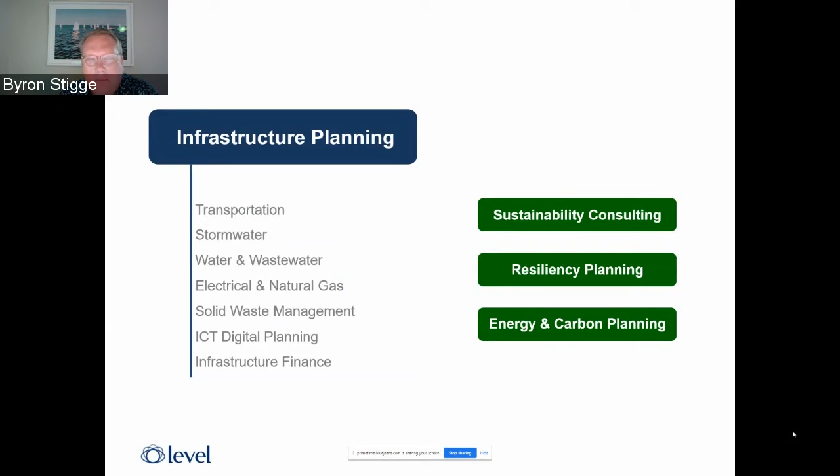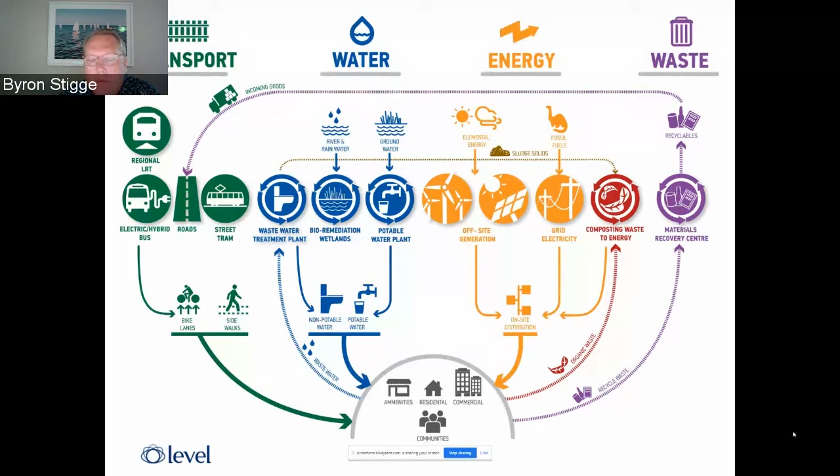Thank you, Michael. Good morning here in New York. My name is Byron Stigge from Level Infrastructure. I thought Michael asked me to start with a broad perspective on sustainable streets. My practice is infrastructure engineers. We're civil engineers and transportation planners, and we work on a lot of master plans and sustainability plans at a neighborhood and city level. Our practice really focuses on integrated design between systems. So we're not only focused on stormwater, we also work on bike lanes, renewable energy, and solid waste management, trying to see how those systems work together from an engineering perspective. So that's what I'll be focusing on today.

Our practice focuses on achieving sustainability through systems thinking, interconnected symbiotic systems, nature-based systems, post-carbon infrastructure, climate adaptation, and an inclusionary, participatory process, not a top-down process but a bottom-up process.

These are big principles, and we all acknowledge that when you start talking about sustainability, some people go right to solar panels or bioswales or some technology. Sometimes there are broad statements about resilience and holistic systems, and we found it helpful to structure benchmarking systems and costs in a way that makes sustainability more of a process than just a technology or a product.

So starting with vision principles is important, then getting key performance indicators and setting targets for yourself before you even start the design process. Once you have targets, you can measure costs against your targets and iterate between costs, design, and targets.

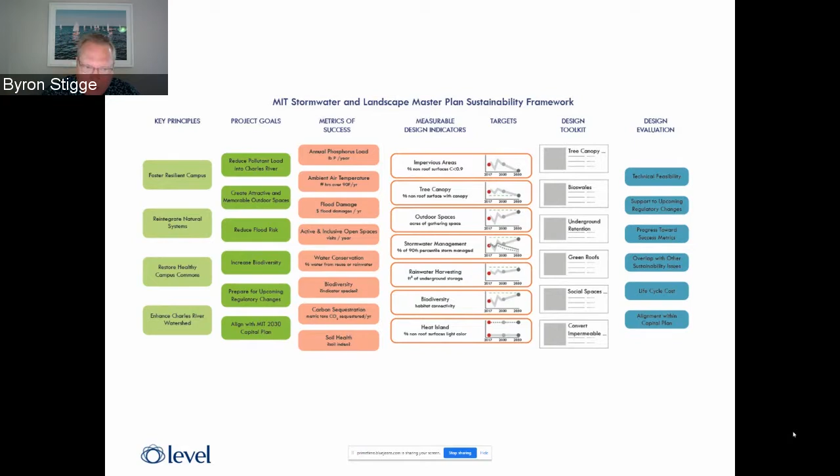So you can see that arc of the sustainability framework we use in our practice, and we find it helpful to put those broad statements in place alongside the details.

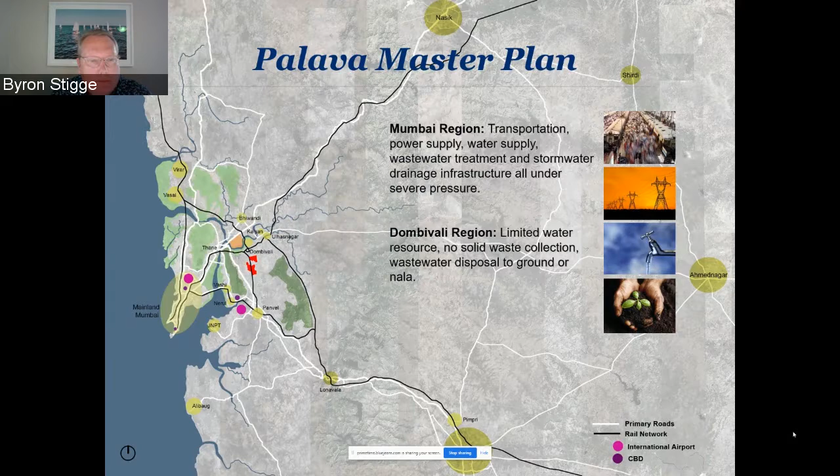I'm going to show you how we worked through a similar process in India, in Dombivali. I'm sure you've heard of Palava with the Lodha group, east of Mumbai, about 20 kilometers or so. I started working on the project about 10 years ago, the concept master plan with Sasaki.

Lodha group has about 10,000 acres, really large, a couple of large parcels, and we developed mixed-use integrated neighborhoods around green spaces and lakes, with strong urban corridors and residential streets on the side. You can see quite a lot of residents and jobs projected.

In the context of this webinar, I wanted to talk about the process I've been working on for this project over 10 years. Some things have been built, and we've learned a lot of lessons in that time, which I wanted to share with you all.

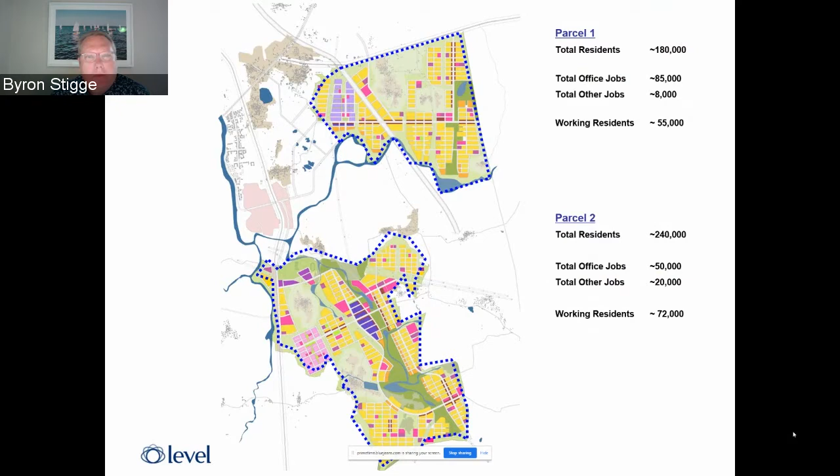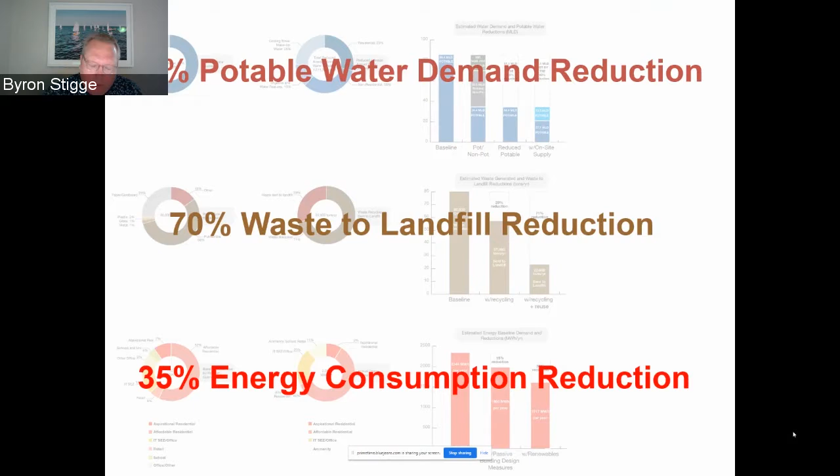We started again with broad goals, and I think our most ambitious goal, considering the environmental issues east of Mumbai, was water. We wanted to understand how the city could reduce drinking water demand dramatically, not just with low flow fixtures building by building, but with neighborhood and city scale solutions. How do the streets fit into that?

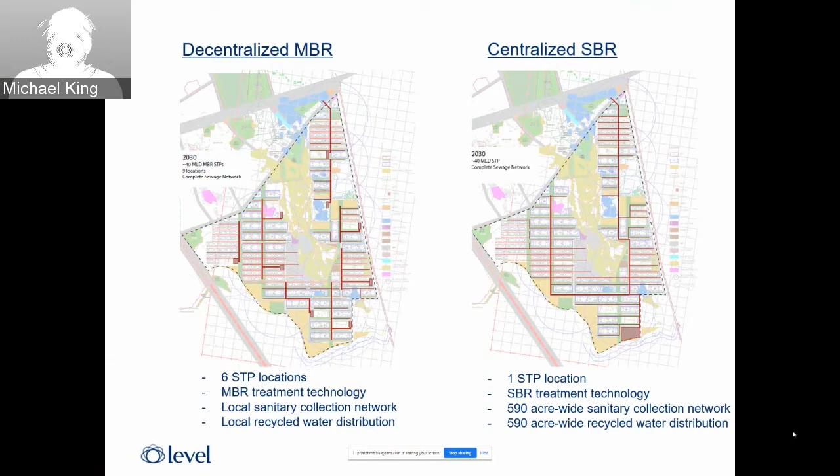So we looked at a variety of options. One of the most important aspects is always wastewater treatment and recycled water. Because there are hundreds of buildings on these parcels, the typical building-by-building wastewater treatment and recycled water solution wasn't really desirable. You can have economies of scale and improve technology and cost when you work at a larger scale.

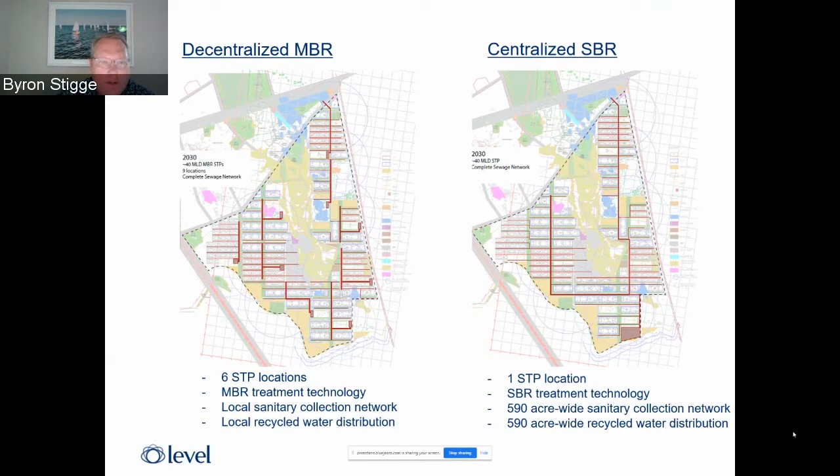So the streets were the primary corridors conveying wastewater treatment. We looked at both decentralized and centralized systems, and ultimately went with a centralized system. The streets acted as the vertical, north-south trunk lines for stormwater, wastewater, recycled water, parking, et cetera.

In the background, I don't have too many good photos of these buildings, but they're actually quite nice parking garages with a nice facade treatment. They're integrated buildings, not just car parks. That's where the wastewater treatment plant is located, and where the recycled water is stored.

That's also where the bikes are stored, where waste is transferred, and there's an electrical substation there. So a lot is happening in those utility buildings, which means the streets leading up to them are quite filled with utilities.

So the street is performing the function of making the neighborhood and the city more sustainable and functional, to achieve those broad sustainability goals.

This was one of the early sections from the design team, from the architectural team. The first time I looked at it, it was noticeably missing anything below the pavement line, and I think sometimes we see that a lot—designers are thinking just about what's happening with what you can see.

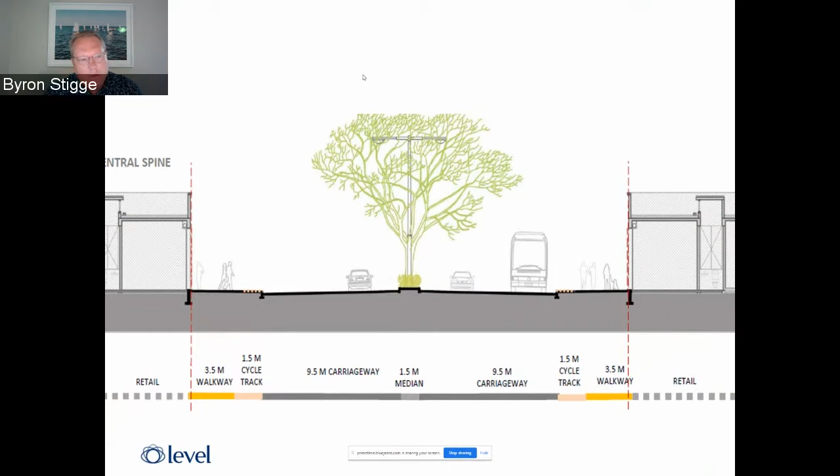But there are a couple things that are good here. There are these big trees that provide a lot of shade. We were thinking more trees on these corridors would enhance the environment. And there was a cycle track, bus stations, a nice sense of that retail and walkable spine. So we thought that was a lot of positive things.

But what ended up happening is when you overlay all the utilities, you don't have room for the trees or the street lights or the swales or anything else. So in terms of a design process, you really have to think about all the stuff that goes into a sustainable street.

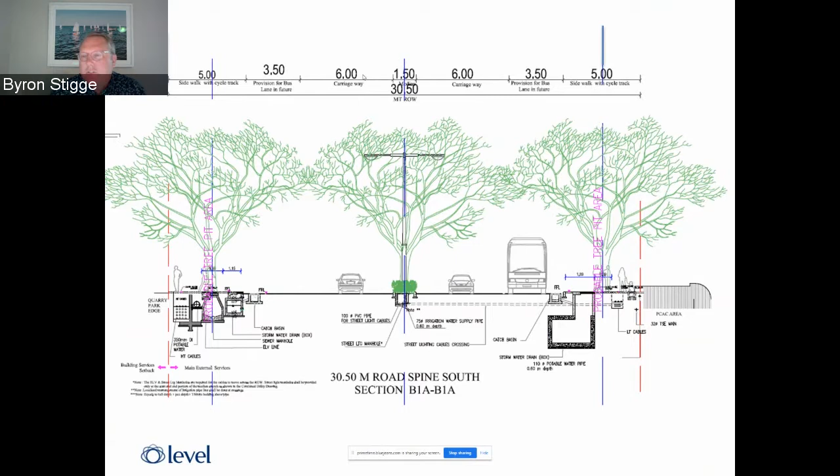Going across from left to right, there's ICT cables, electrical lines, drinking water, storm water, a sewer line, street lights, irrigation for the trees, street lighting electrical lines, a catch basin, more storm water, and more electrical cables. So there's just a lot going on, and we struggle to get any of those utilities in the street.

You can see the street here is just pavement, and all the manholes and all the utilities are in the sidewalks. That really took away from the quality of the street, because now it's not shaded, and there's a big setback between the buildings—the trees are set way back.

So as we move forward in the project, we're trying to push as many of those utilities—not all of them, but some—into the street right of way, where you can put the manholes and allow some space for green features and other stormwater management and urban heat island effect improvements.

You can see how some of that starts to improve over time. It's a great project to learn on, because as you build phase 1, then phase 2, then phase 3, you can always learn and improve from the design.

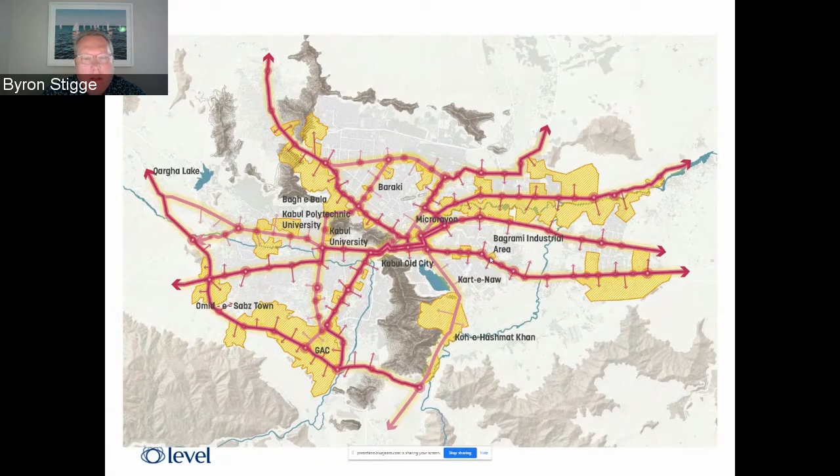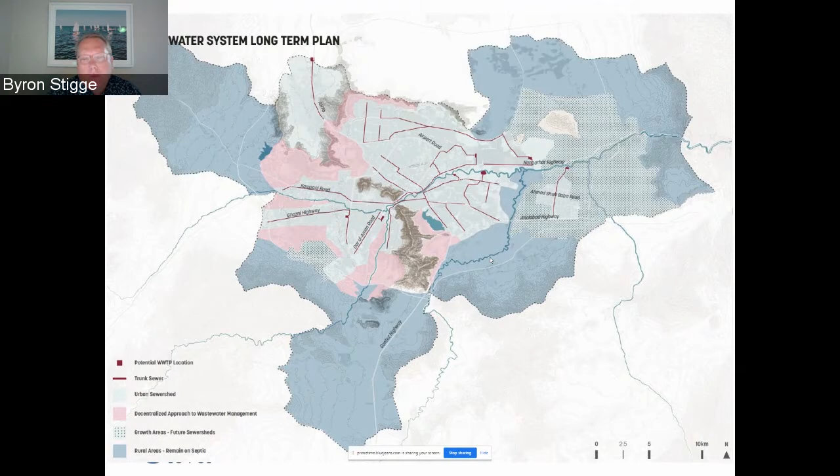And of course, the landscape and the urban design were all developed. But from our work, we used those corridors as the primary pathways for trunk stormwater, trunk electrical lines, and trunk wastewater systems, again at a city scale.

By developing that corridor, that sustainable street, over time the networks can be built out. With the public investment in the streetscape, a lot of private and community investment can then bring water and sewer and power and ICT into that trunk line, and recycled water as well.

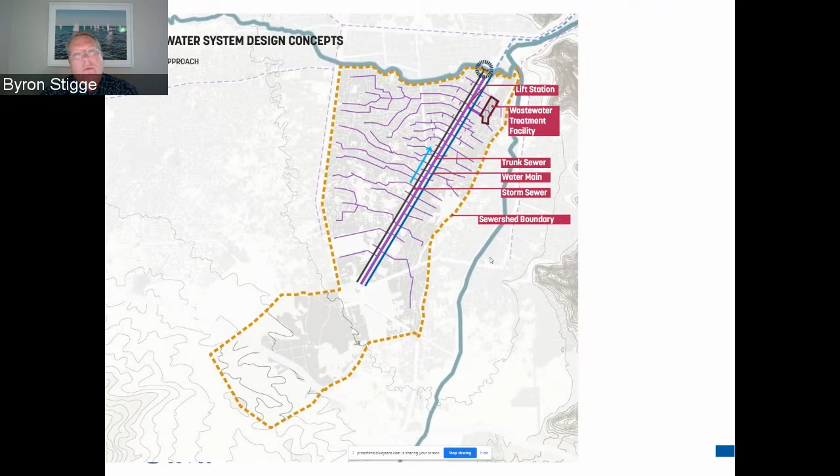The function of that street has so much going on. There's a BRT line, street trees and bike lanes, storm sewers under the BRT lines, drinking water lines in the sidewalks, electrical lines in the sidewalks, bioswales—really a rich and complex street design.

The idea was just to focus investment in that urban corridor, which would then have spillover effects and rejuvenate the neighborhoods on either side.

Of course, it's not just a design process, and we really learned that on this project in Kabul when we started to map the stakeholders working in that roadway. It's not just the Ministry of Public Works, there's the municipality itself, the bus riders, the donors, the water supply, the power company, private developers, and of course, most importantly, communities.

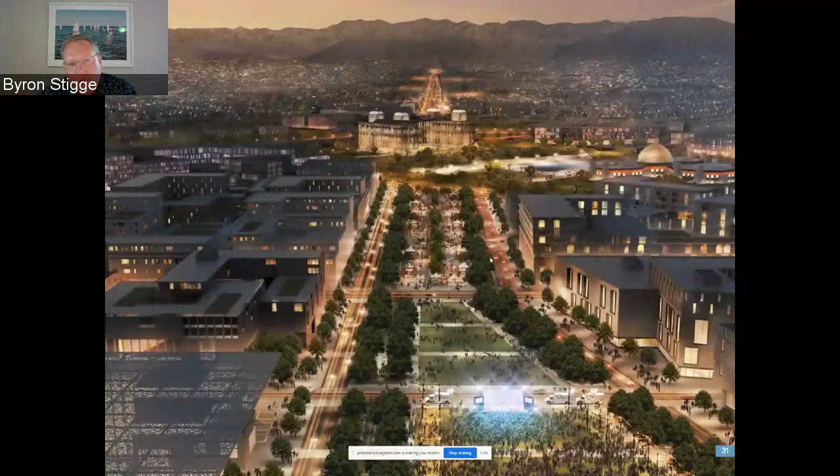There's so many stakeholders engaged in streetscapes, so getting them all on board with the vision and the opportunity of making sustainable streets was actually as much a part of the design and the project as the actual cross sections and where the utilities go. This was the vision of these sustainable streets: to really bring Kabul back to a 21st century, rejuvenate the city, and look forward instead of backward for the people who live there.

We have a lot of experience all over the world, and one thing I've noticed as I travel is every city, even different parts of cities, has a way of doing things. The streetscape looks like this, but every one of these streets is different. Every one of these municipalities, communities, cultures, weather patterns is different. So obviously what works in San Francisco is not going to work in Delhi, but there are some things you can learn from others. I really try to encourage people to look beyond their own streets and around the world and pick some good things, because a lot of good things are happening around the world.

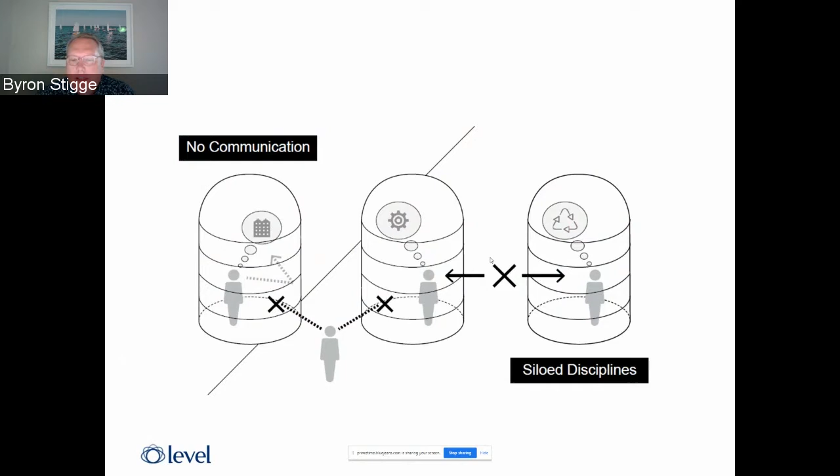Really collaborate. Collaboration is the key to innovation today. It's less about new technologies and more about bringing people together with different disciplines to work together and find new solutions. That multidisciplinary thinking is where we find a lot of solutions to sustainable streets.

With that, I'll pass it back to Michael.

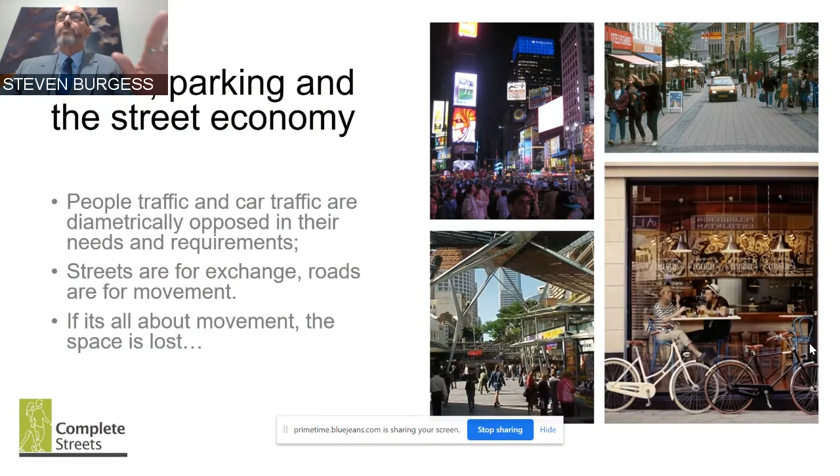If you make it all about the movement and not about all those other things Byron talked about in your street, you will not prosper. It will be too difficult for you. Your streets will be working too hard and your city will always struggle.

Now, I always develop these and I have them sitting on my desk to this day, and I keep changing them, I keep refining them, and you'll have access to this so you can copy some of mine if you like, but make your own. When you're working in street making and city making and development, and all those different things that go into making streets, there is a lot of white noise. It's coming at you from everywhere.

You're being pushed and pulled and made to change your mind. Oh, I want more of this. I want more space for this type of infrastructure. No, I want more space for this. You have to find a way to keep focused on what you're trying to achieve, which is a clean, green and safe space where the community can prosper long term. That is, a space that can be sustained.

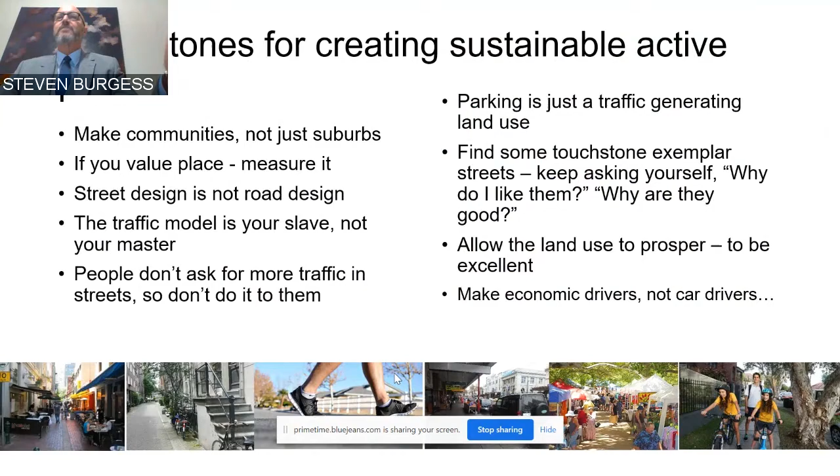Sustainable, active place where people can prosper. I've got a few there. Feel free to steal as many as you like. But by the same token, make your own local ones, so that when all that happens to you, you can stay focused and say, I know what I'm doing. These are my touchstones that I keep going back to. This is how I'm going to make a good community where I live.

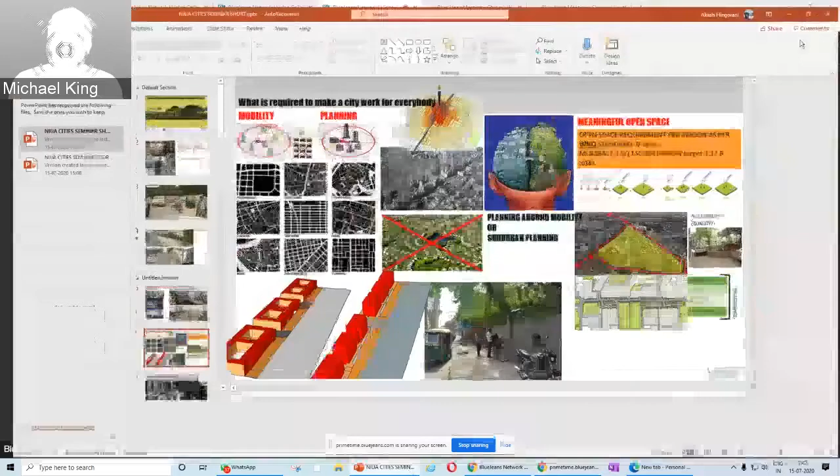I assume it. Can you see my screen? We can see a screen. We assume it's yours. Okay. Got pictures. Whoa, it's got a lot of pictures. Now, once you hit present, it's going to have the bigger pictures. Take it away. Okay.

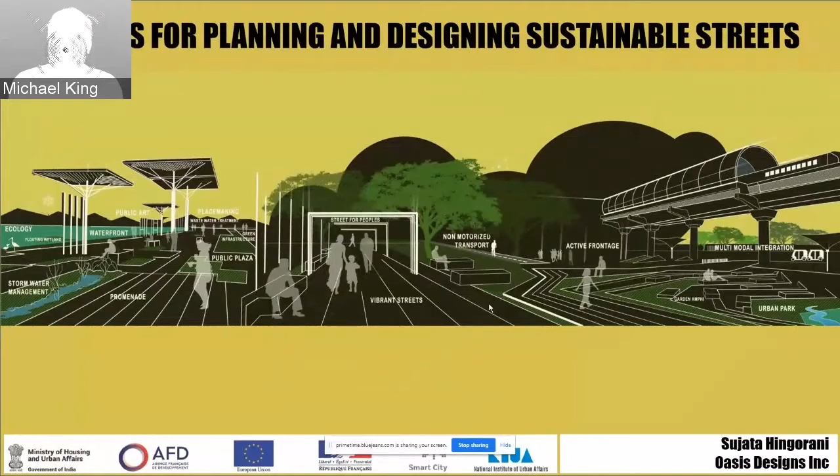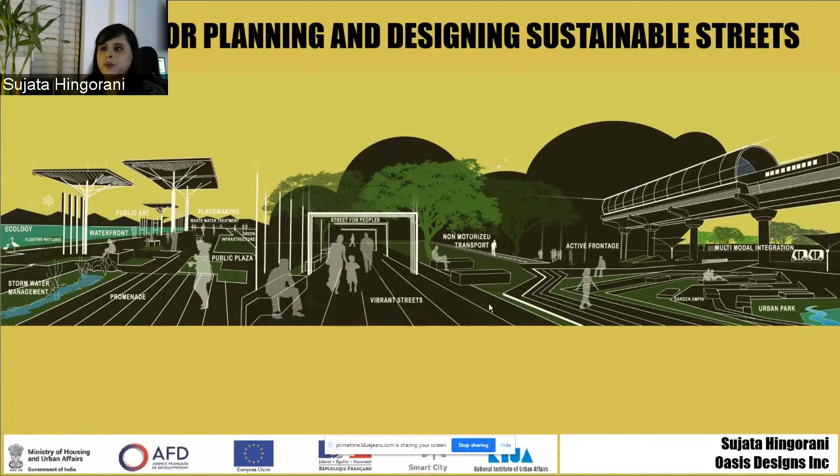Hi, I'm Sujata Hingorani. I am from Oasis Designs Inc. We are a multidisciplinary firm in Delhi. We are mostly working all over India on public realm projects.

So we are talking about streets today. Let's focus on what is the primary function, as my previous two speakers also said, that the primary function is about movement of motor vehicles, non-motorized transport, and pedestrians. Now, for each of these, the space given has to be according to their speed, comfort, legibility, and safety. Streets are also used for running infrastructure, conduits, and access of shop fronts, buildings, etc.

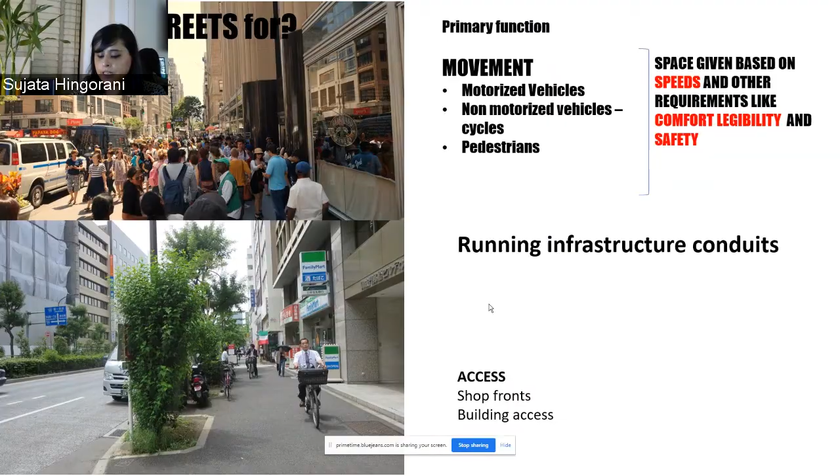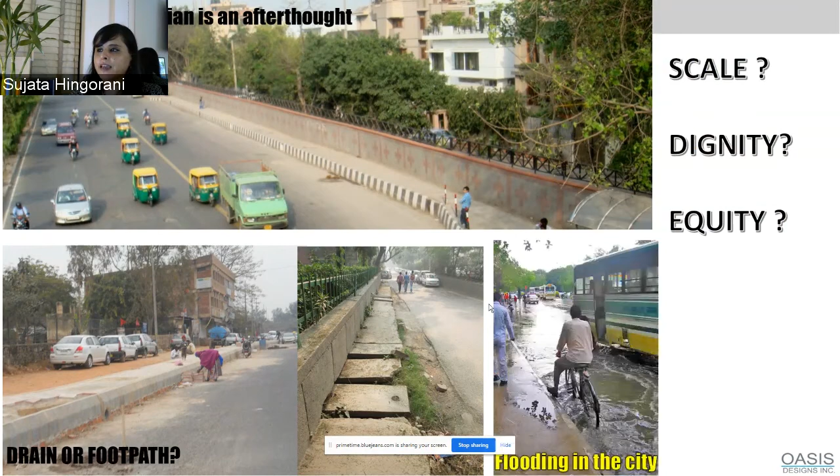But the problem in Indian cities is that we primarily focus on the vehicular infrastructure and just leave the rest as is. And even if we give a footpath, it's actually a foot wide in lots of places. Sometimes the footpath is an extension of a drain top, and then it still does not solve the flooding in our cities.

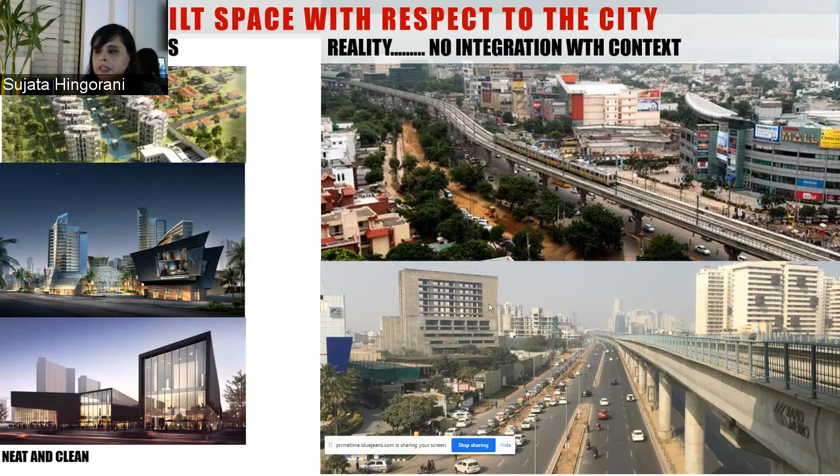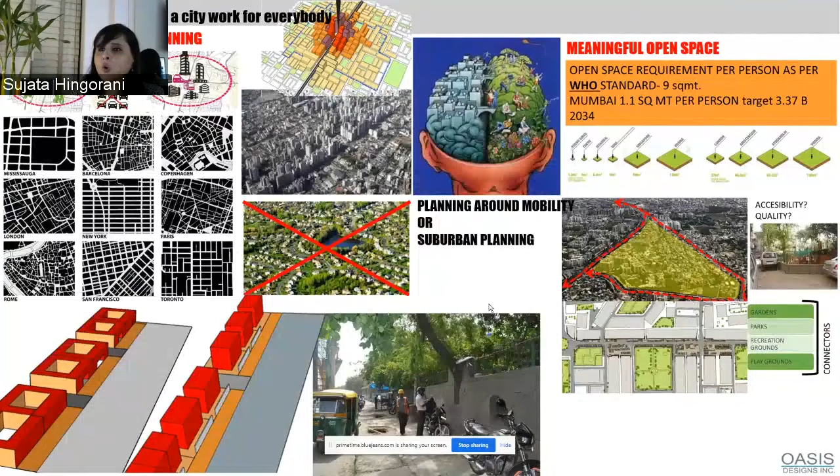And if you look at the private infrastructure, what people focus on is just within their property, and the outside is just left as is. So there is no integration of private developers to the outside systems. So what is required in our cities is holistic planning at a macro level.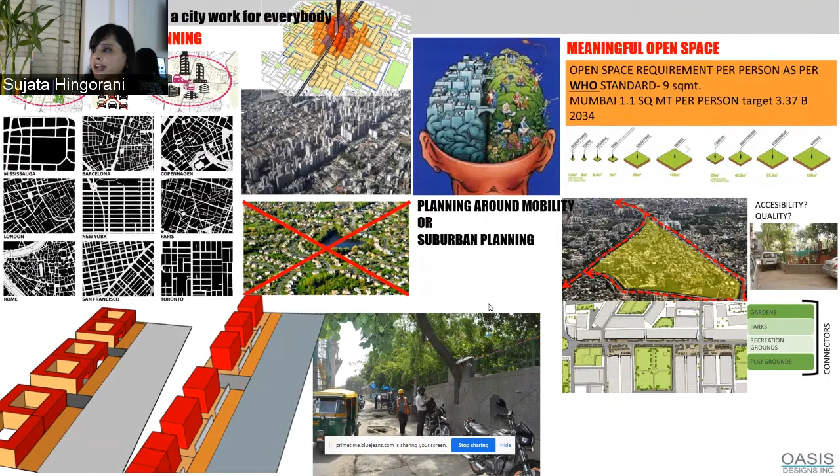The best cities are planned around transit, and at the micro level, even policy decisions of our city authorities, like having setbacks and all, are in fact bad for the city in terms of safety, etc. And even the open spaces which are there in the city, the access and accessibility, and what kind of open spaces, which is a requirement to have a better life.

Especially during this COVID times, we realized that open spaces are the safest for people. So as humans, we need public realm. It's not just a pretty little thing. So what is public realm? Parks, plaza, street, anything which is public and not private.

But where are we spending all our money? In India, we spend huge amounts of money. The government spends a huge amount of money on making this car-based infrastructure. But then what are we doing to the cities? The quality of space is totally gone for a six if we just focus on vehicular infrastructure.

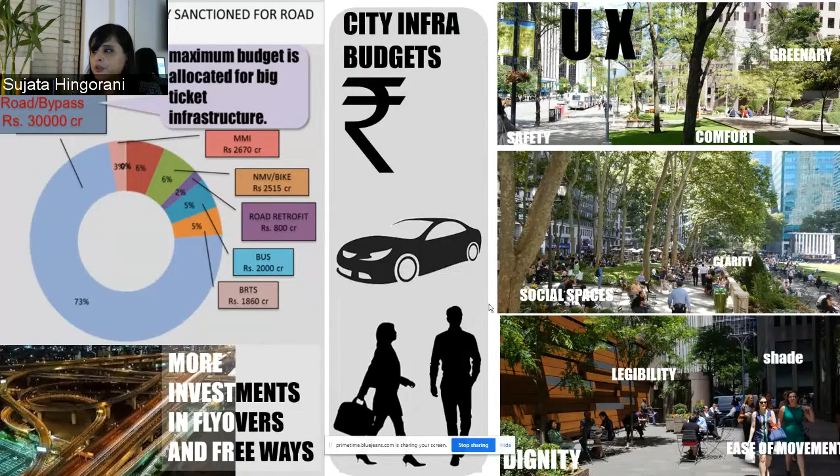So we are looking at user experience, and though it's a little complex to design that UX, this is what we should do. Then only our cities become livable.

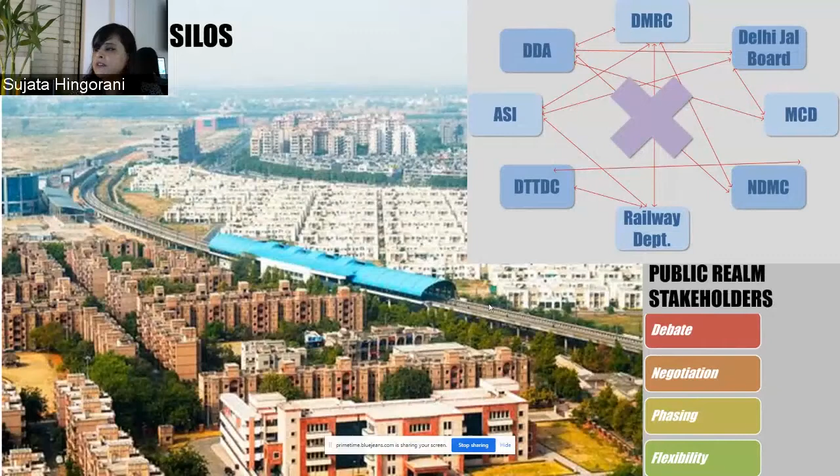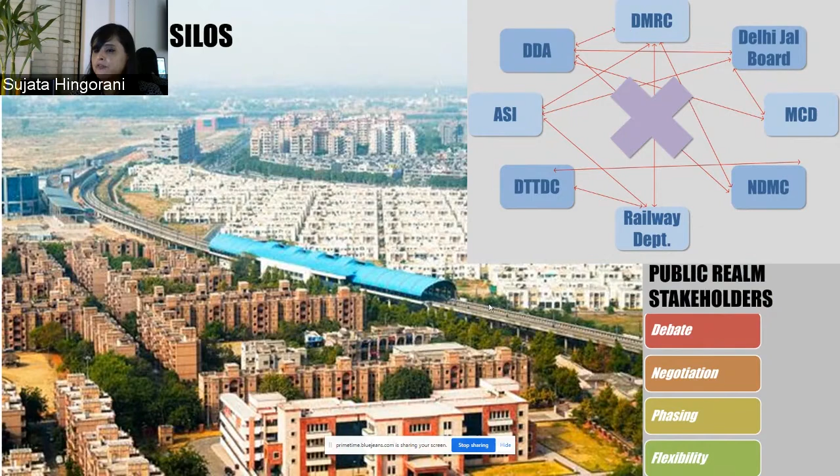But the problem in India is also that a lot of agencies, and how to work with the different layers of planning agencies coming together. So we have kind of learned over a period of time how to work with our Indian agencies through debate, negotiation, phasing, and keeping flexibility in mind.

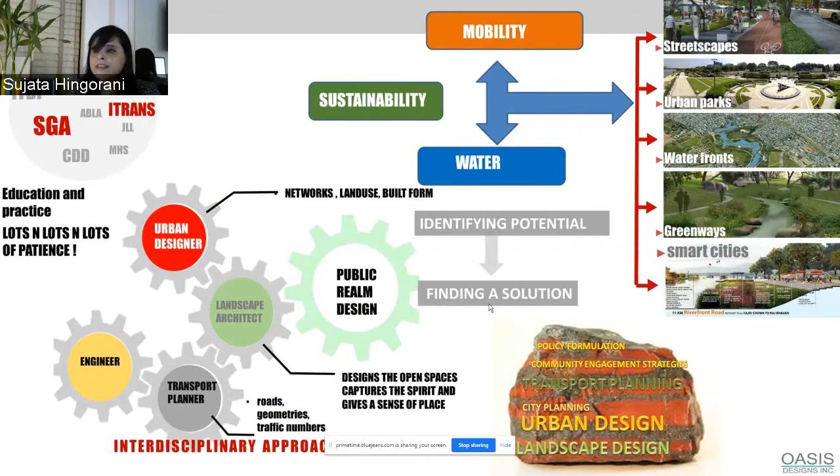Now, our work is kind of centered around mobility and water, and we work on various types of projects from streetscapes to urban parks, waterfront, and greenway. We've learned a lot from our co-partners who are transport planners and urban designers, and it can't be like a single lens thing. We have to look at all the aspects when looking at public spaces in our city.

And we have been lucky to work on many cities, and what we focus on is the heritage of a particular city. We look at the city from its own point of view, contemporary aspect and natural features, and how they are interrelated to each other.

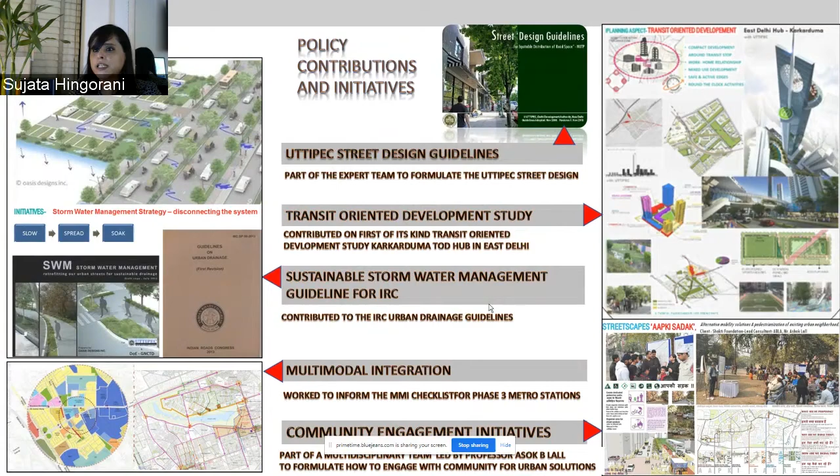We've also had the privilege of working on some very important policy contributions like the UTTIPEC Street Design Guidelines. We worked on the TOD study, the first of its kind project in Delhi, and we've also worked on the stormwater management guidelines for IRC.

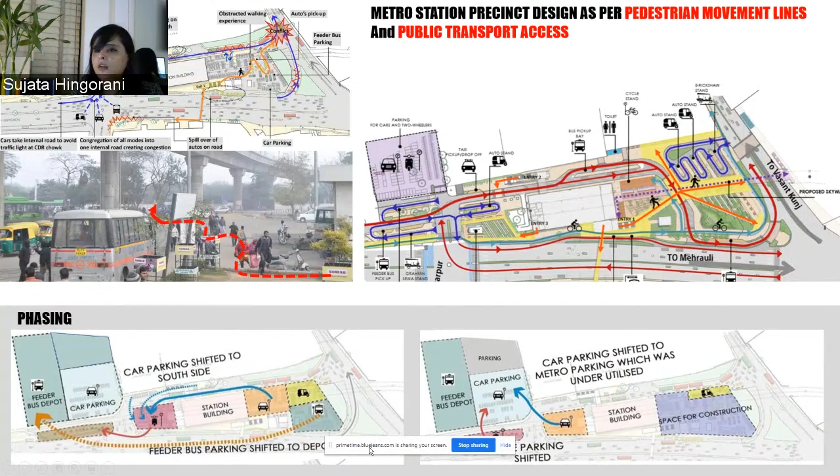So what we did was to understand the activities around, and then we managed the whole system around the movement lines. We realized that we really don't need so much space, and there was a parking lot at the back. So we utilized that parking lot, and because it was a running station, we phased the whole project so that slowly all the parking could move behind.

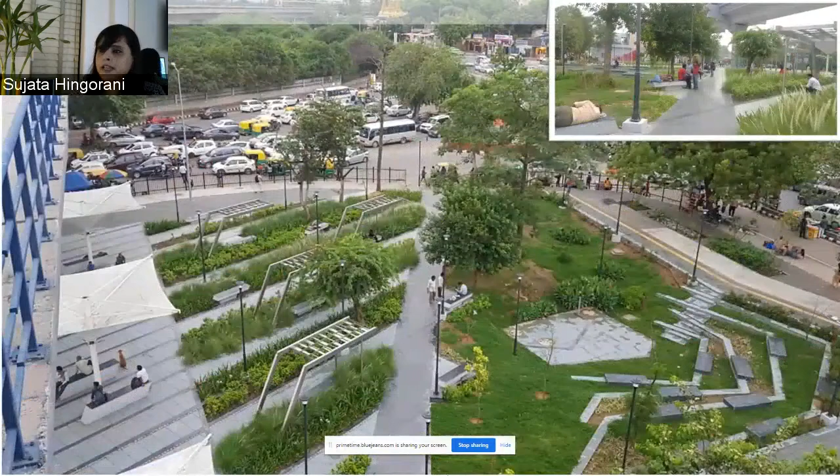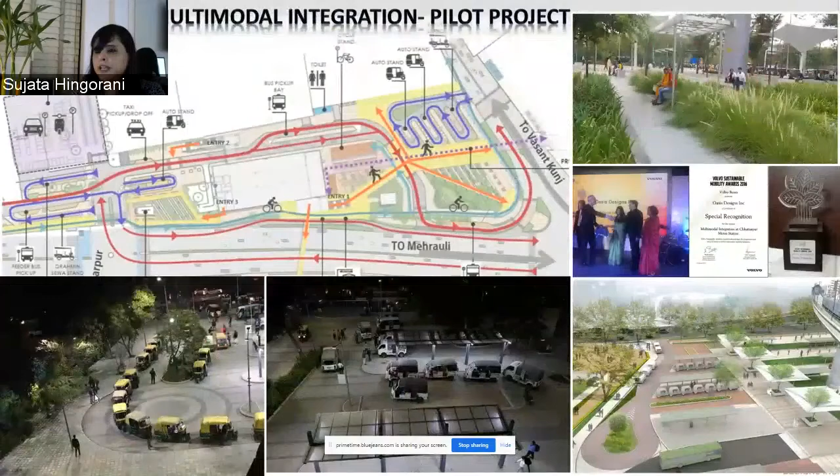So this was what it was earlier, and now through only the movement lines, leaving the rest of it green and landscape plaza, this whole place has kind of turned around. This is like a desire line going to the junction, and this below is going to the multimodal auto stands and everything. Rest of the area is left as landscape, and this is the place where you can get your IPT and autos and all.

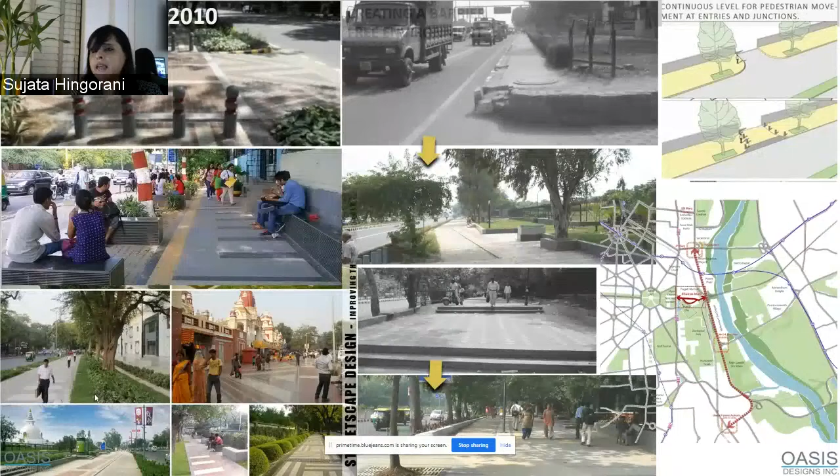It's won some awards. We have been doing street designs since 2010. During that time, we understood the various aspects of street design, and this was in 2010.

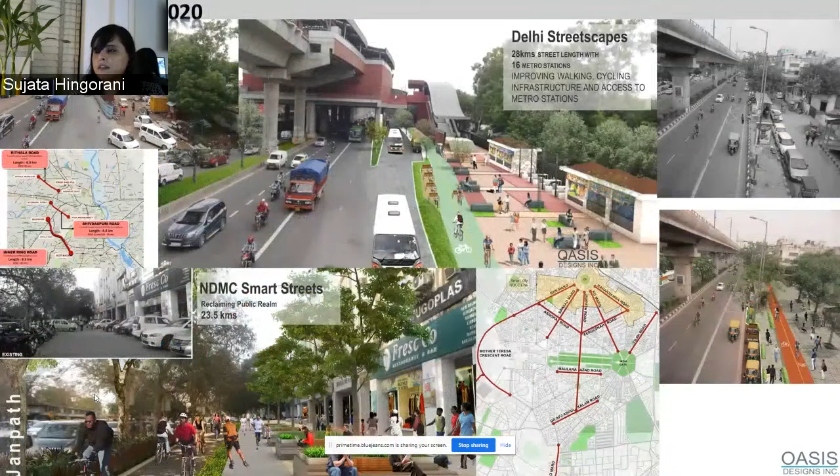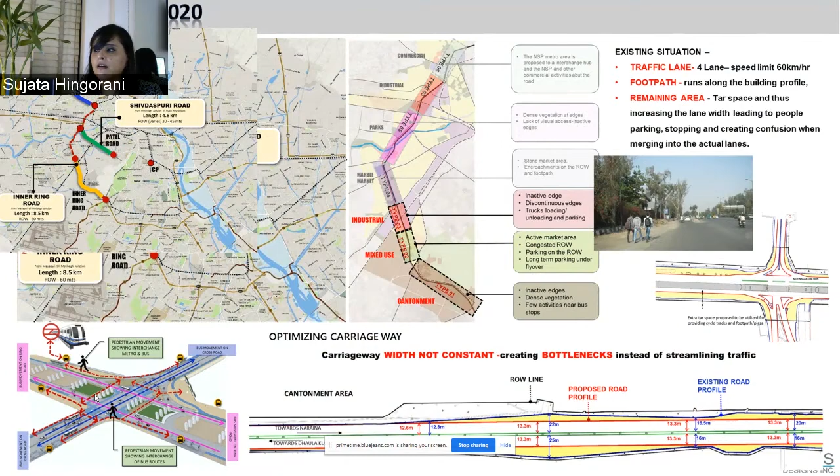Right now, we are working again on some networks of streets in Delhi, including in the NDMC area. Again, we are looking at it from the aspect of how to optimize. I think my earlier two speakers also talked about equity and how you give space to the people on our streets. So this is what we are doing.

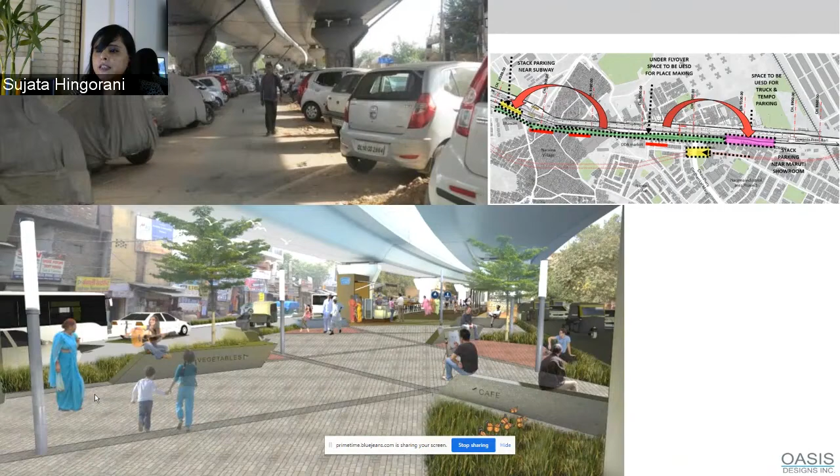These are some before-afters. Even the under-flyover area, this is a place in Delhi, Naraina, which doesn't have any open space. So the under-flyover area is going to be looked at like a public space so that it can be used. There are a lot of these open spaces which have a swale by themselves, so we are just going to landscape it, develop it like a dry swale, and when the water comes in, we'll make it like that.

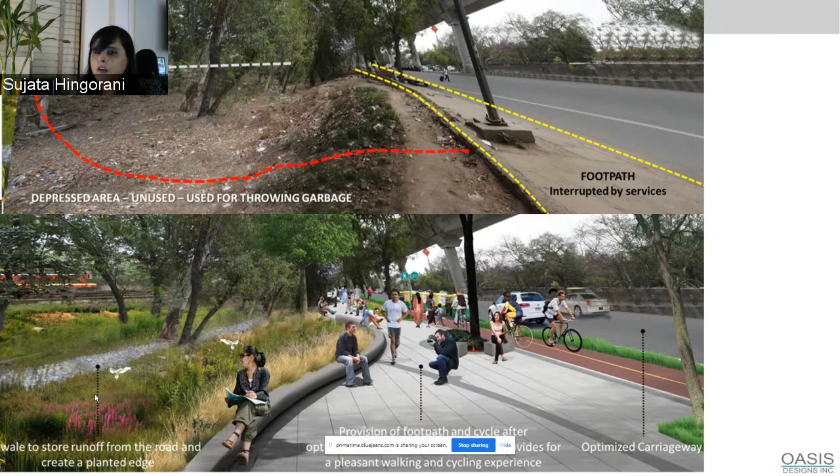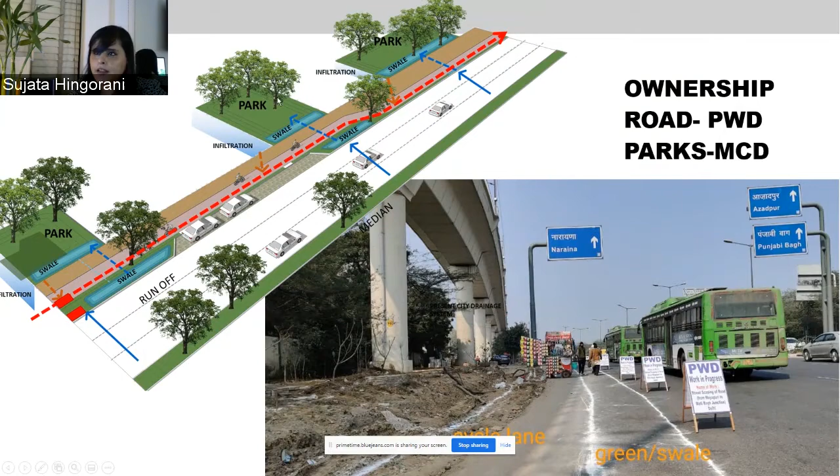The project had started just before this coronavirus came in, but now it's become a little slow. But we are adding all of this. There is a problem again, like in this case the agency, the road owning agency is PWD, and behind is MCD. So how we talk to the other agencies so that some additional water can go to the park and all, that has to be looked at.

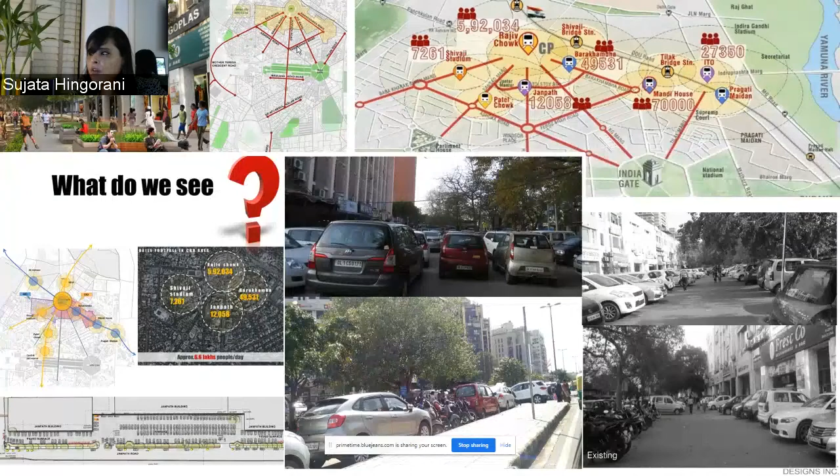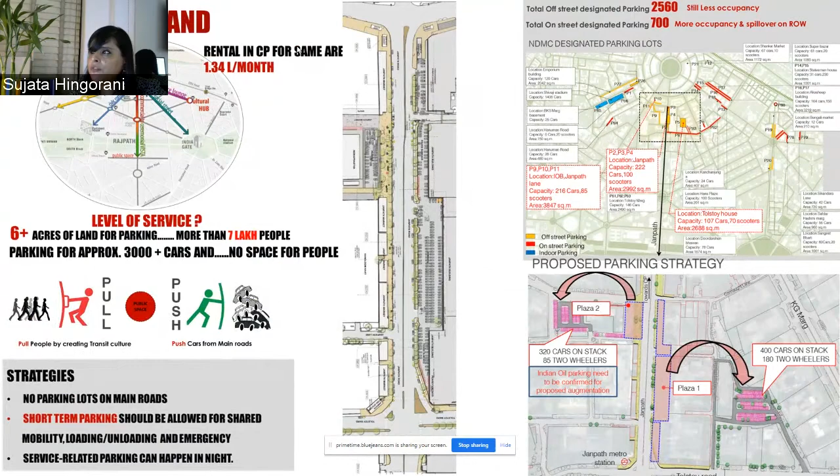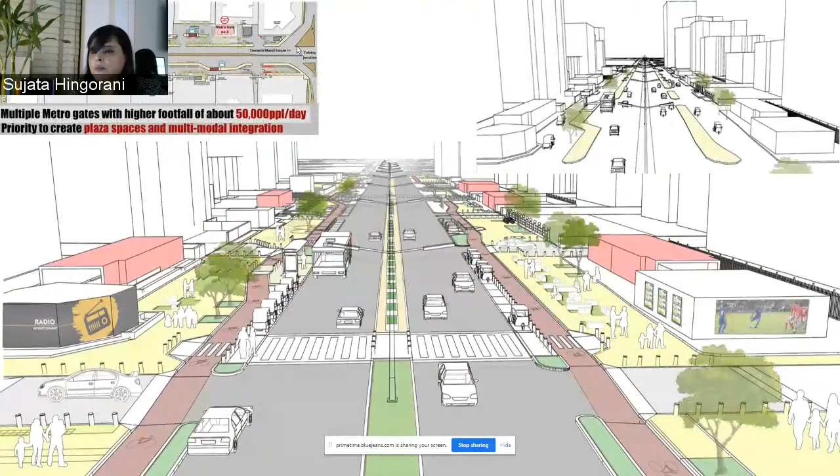In NDMC, we are doing some streets which are in the CBD area, but right now the streets basically have a service lane and a lot of parking in the front side of it. So what we are telling them is that there is some parking in the back of the building, so shift all the parking there so that the front of the street can become a pedestrian plaza. Similarly, there is this Barakhamba road, where again we are going to have a full plaza instead of a service road out here.

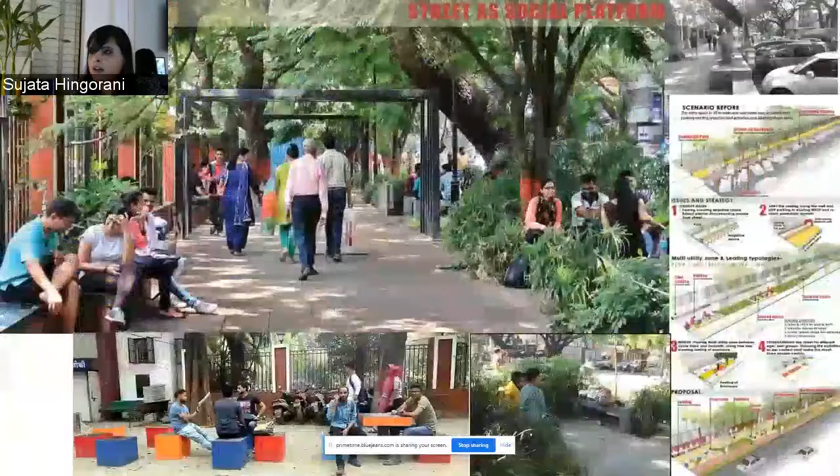Now, this is a project in Pune where, again, we were working on a network of streets, and this is the pilot street which really came up quite well. This is the JM road. Again, we optimized the street. Earlier it was a one-way street which was very wide, so we made the optimization of space, and we looked at this whole space as a public, social space where people can sit around and just be there.

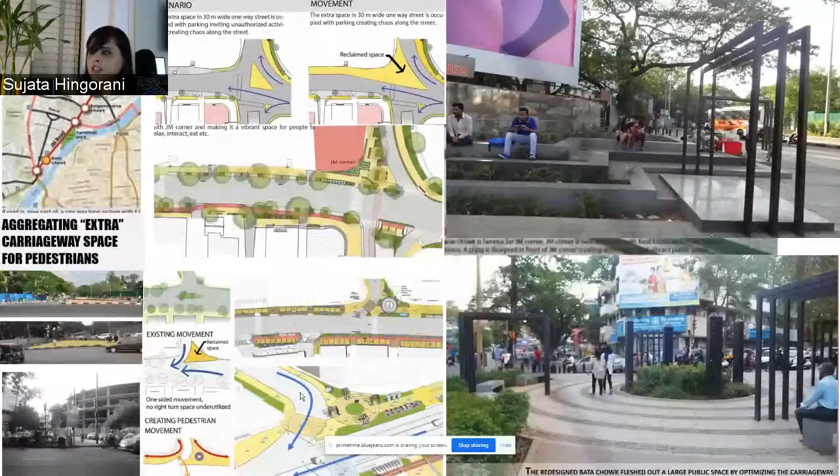So from the start, we took the easiest part and then moved forward so that we can get a buy-in from the shopkeepers. This was next to a garden area where we made the whole space. Then the shopkeepers were happy to incorporate it into the whole street design. The junction also, whatever additional space was there, we took it up and made it into a plaza. Because it was a one-way street, we could actually make the geometrics of the junctions in this way.

Now, Baden was talking about the value of the place. Actually, we have seen in real time how the front setbacks were changed into shopping, and how the boundary walls were moved and changed, becoming more into active space with different activities taking place.

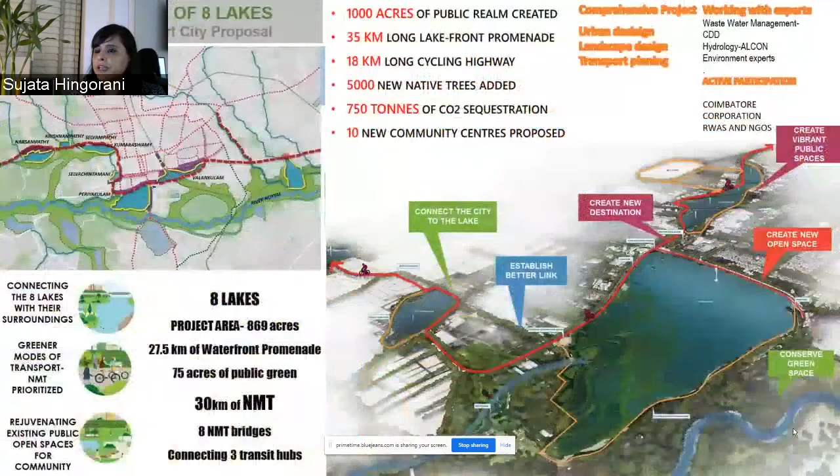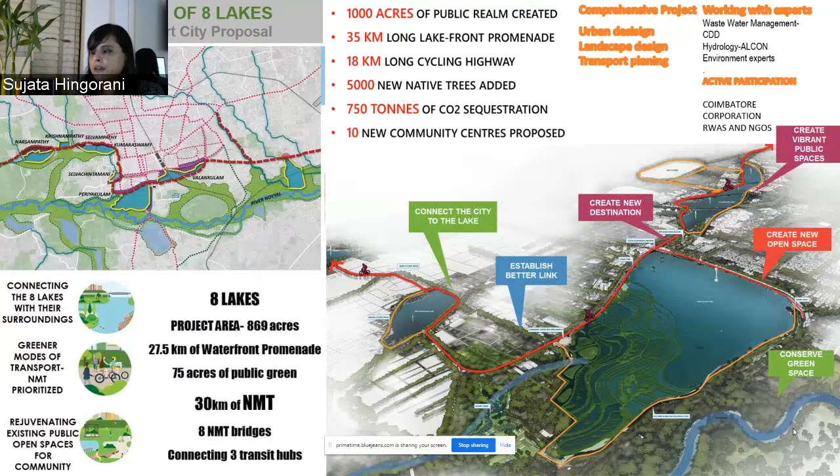This is the final project I would like to show you. This is in Coimbatore that we are doing, part of the Smart City project where we are making 35 kilometers of NMT system around the existing lakes. These lakes were basically designed by the Cholas, who were the earlier rulers of Tamil Nadu, but the rest of the area was just lying like that.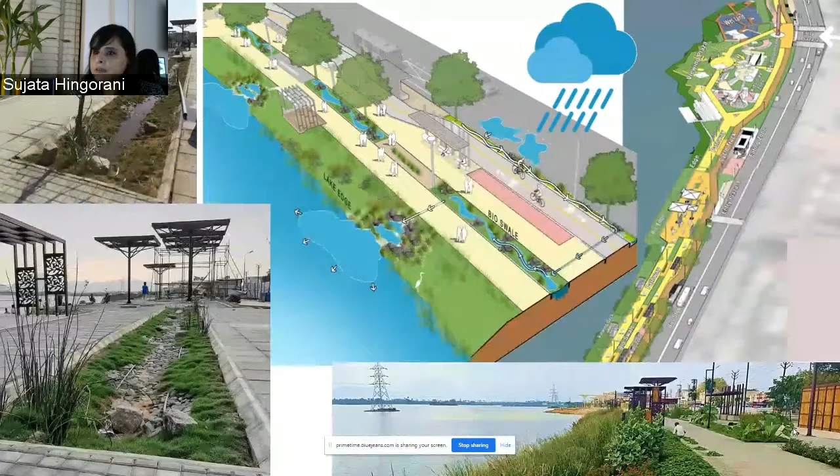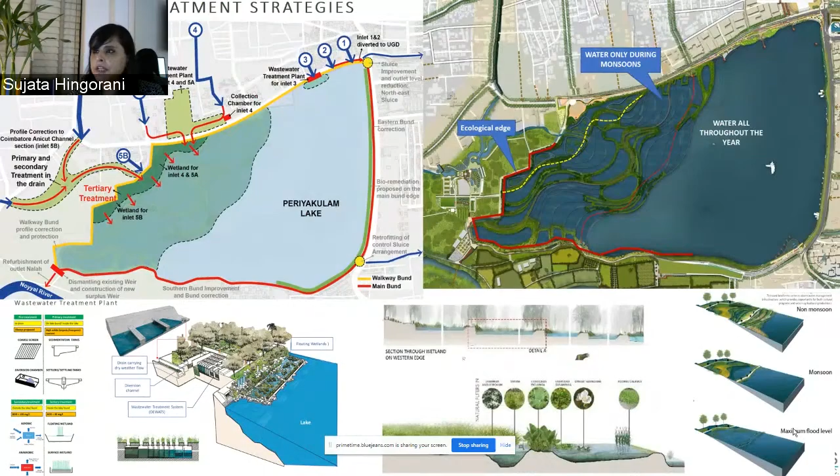So we are reviving the areas around the lakes into public space, and we are building stormwater management systems within the landscape so that it becomes a showcase for people to see. And all the drains opening onto the lake are being treated through phytoremediation so that good water comes in.

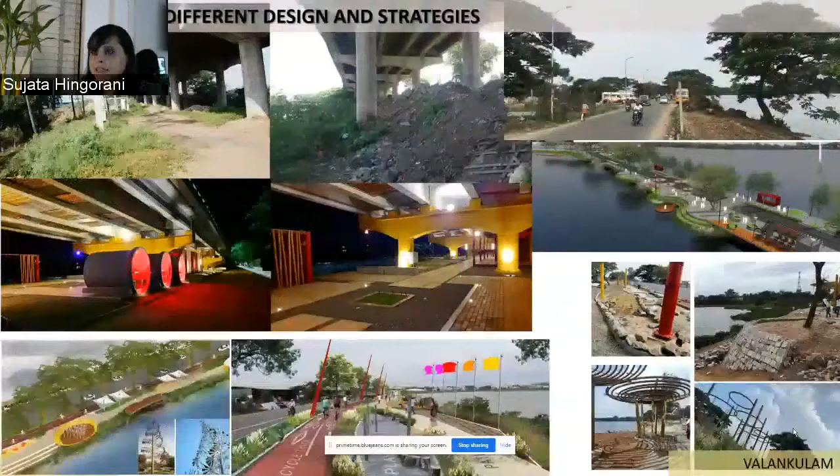Some parts of the project are already done, and each and every space is being utilized. Like this was under the flyover, the space was just lying like that. We are making it like now it's become like this. So each and every lake space is being treated differently to extract the best out of the space.

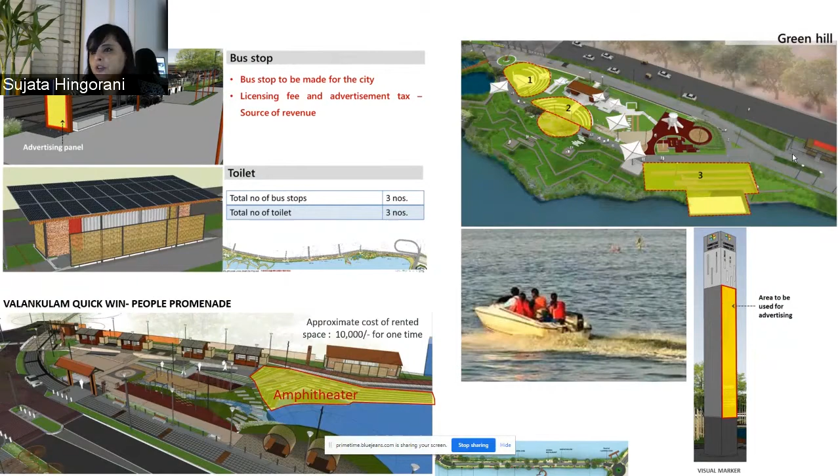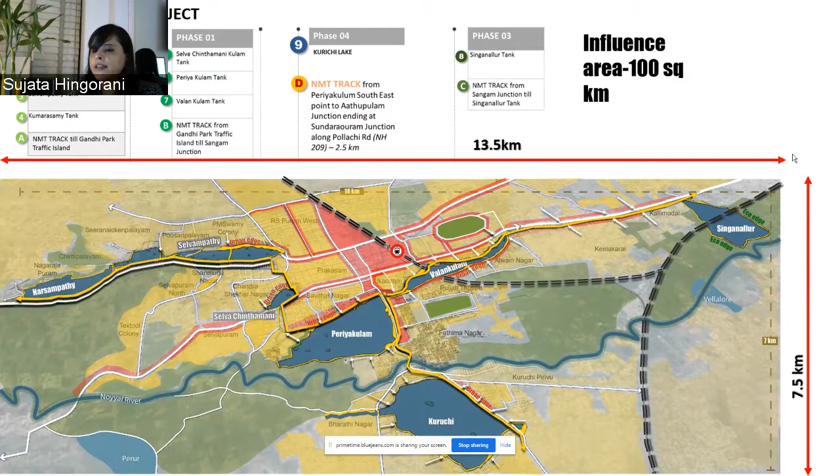We are also looking at the O&M so that the whole project becomes viable without it being a strain on the government. Once the project is done, the influence area will be around 100 square kilometers of the entire city, and I think it should become a benchmark.

I would like to end here by saying that we should not waste even an inch of public space in our city, and give it back to the people in the best possible way. Thank you.

Thank you, Sujata. That was quite wonderful. I want to quote you, or sort of quote you. I think you said a drain cover is not necessarily a footpath.

This is true in my observations around the world, that traffic engineers say there's a bunch of pavement, then a bunch of roadway asphalt, and then some bit of storm drain on the side, and they cover it up and put lights in it, and say, oh, this looks like people can walk there too. Done.

These are the kind of things, because in the Q&A, one of the questions was, how do you overcome bills, legislation, policies which are inherently formulated to advocate for motorized vehicles? In a previous webinar, we talked about safe streets and the IRC, Indian Roads Congress guidelines.

One specific thing there was that the road guidelines call for a minimum 1.5 meter wide footpath, maybe larger in different situations, but at a minimum 1.5. For a wheelchair, basically in my view, that 1.5 meters is so two wheelchairs can pass each other. It's kind of the standard around the world. It should be larger in a lot of places. But the point is the IRC guidelines say you've got to have a 1.5 meter minimum footpath.

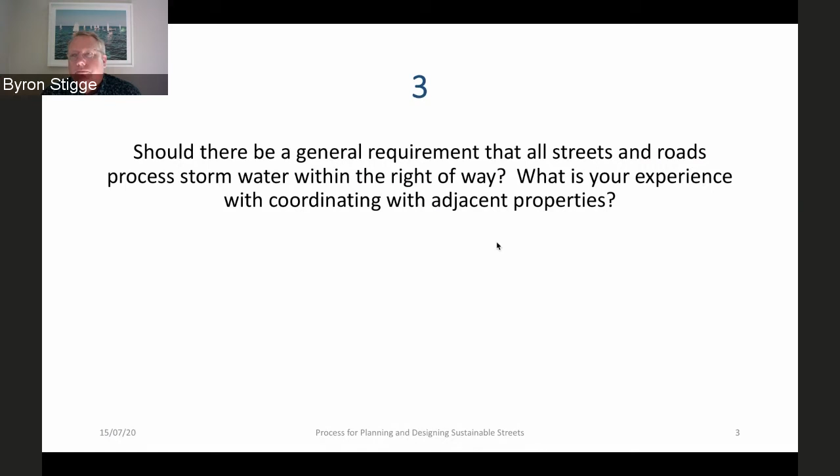This is a personal issue for me, because in my house, my property, I've designed it so that it processes all of the rainwater from the roof and from that falls on my property. I process it internally with a very large French drain. I think there are other people who are passing legislation or thinking about legislation that each property has to figure out how to do it itself. And one way to have that happen is to charge, or somehow create some sort of payment system, where if you have zero runoff, it's free. It's sort of like the reverse of a water charge.